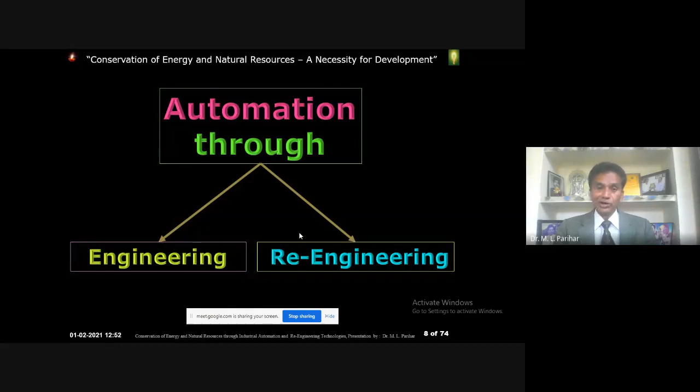Now let's look at human development history. It began with the caveman age, when people lived in forest areas and their shelter was caves. Then came the hunting age, when people used tools made of stone or other materials for hunting animals for survival and food.

Then came the agriculture age, when humans utilized animal power for agriculture - animals were the resource for energy. Then came the industrialization age, after the invention of steam generation and the boiler. Then came electricity, which developed tremendous potential in industrialization. Then came the technological age, when all technologies became available to us.

Everything is now available in our pocket, in the mobile, laptop or system. Now we have entered the 21st century, known as the age of knowledge management - we are attending this session through the internet, sharing knowledge.

You click one word in Google and you get more than 1,000 websites on that particular topic. But earlier, when we were studying, if we wanted to see something, we used to go to the library and refer to encyclopedias and reference books for information.

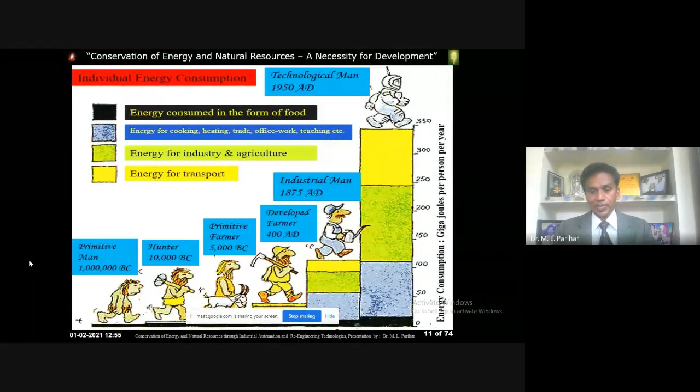There are energy resources, naturally one type comes from overground, and another comes from underground. Overground resources are solar energy, wind energy, and hydro or water energy. Water may be falling water, rising water, or flowing water.

The underground resources are fossil fuel and hydrocarbon, which include coal, wood, and petroleum products. Another resource is nuclear fuel. Nuclear fuel is a new source of energy, a clean, environment-friendly energy resource. It also has two types: fissile fuel and fertile fuel.

So we can see these above-ground resources are renewable energy resources with unlimited capabilities, but the underground resources are limited, and whatever amount is available in the crust of Mother Earth is limited, yet we are continuously extracting these resources, so they are continuously depleting. But nuclear is one of the environment-friendly options available to us.

So we are fortunate that our Department of Atomic Energy has done a lot of efforts to have energy efficiency as well as other applications, from a non-nuclear point of view, for the technological, economical, and societal development of the nation.

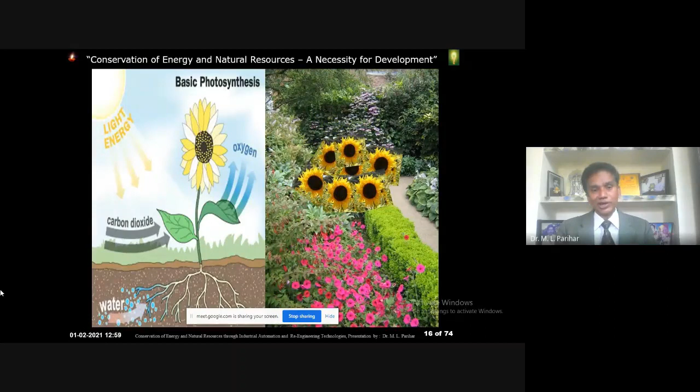Let us see nature's conservation. Nature has already taught us the conservation methodologies. Just see these natural conservation cycles: oxygen, carbon dioxide cycle, water cycle, then fauna and flora. You can see it is very nicely designed. Whoever the engineer or architect cannot design what nature has designed.

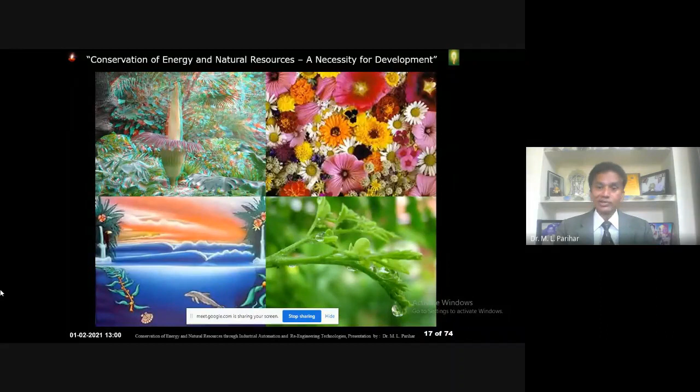You can see everything is fine. Water cycle is there, agriculture cycle is there, carbon dioxide cycle is there, oxygen cycle is there, birds and animals enjoying. These are nature's engineering, whatever nature has done.

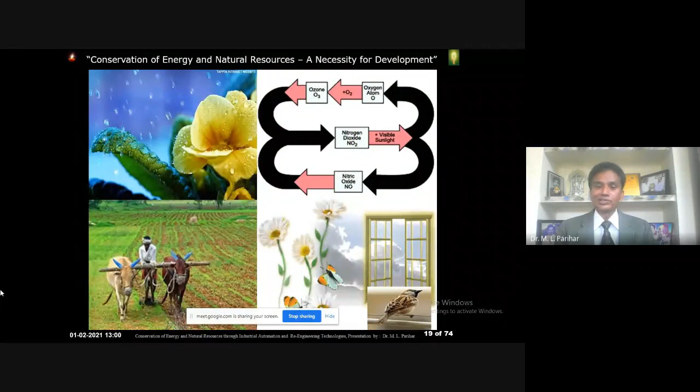Now let us see what our development cost us. We are taking all the resources from Mother Earth - we are taking energy resources, minerals, food grains, medicines, chemicals, water for our houses, industries, and irrigation. We are taking everything, even oxygen, from the environment and nature.

But what are we giving back? Waste and effluent, pesticides and chemicals, pollutants, and we are doing deforestation also. In this manner, nature is getting a lot of challenges.

So we are continuously drawing resources from nature, but we are not conserving the resources, and we are not giving back. Moreover, if we are giving back, then we are giving back pollutants and effluents.

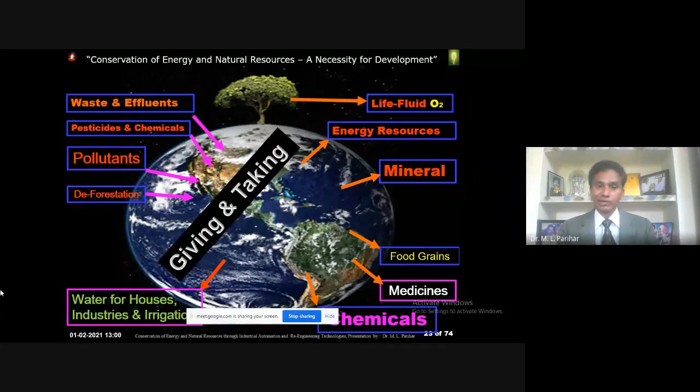We are polluting the environment by generating carbon dioxide and other effluent gases. What is happening? We ourselves are at the challenge that we are breathing in the polluted environment. You see what we are doing.

We have used a lot of plastic, and we are throwing plastics into the natural resources, and we are directly polluting our environment, the very environment from which we get all our resources.

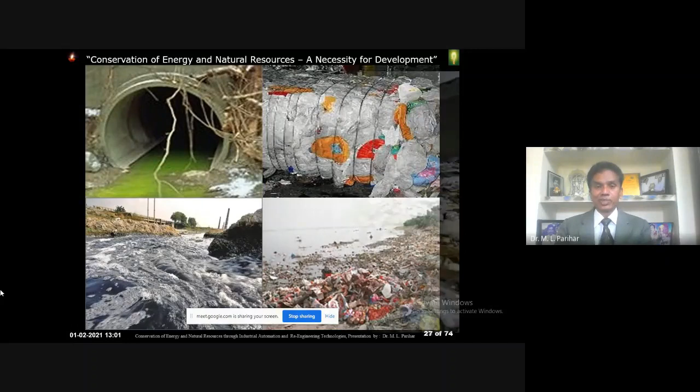You see this is the condition of rivers, our mother rivers. In our country, we treat rivers as a mother, but look how much plastic we have used. You see these animals, what they are eating from the environment ends up in their bodies. We have dumped a lot of our waste products.

Their quantity, their numbers are getting reduced drastically. Now our Mother Earth and nature is sick. We can see that nature, as well as Mother Earth, is in hospital and under life-saving support.

So what should we do? If our mother is sick and hospitalized, we are always worried. We put in efforts to take care of our mother, but we are least worried about our Mother Earth, which in our country is treated as a mother who gives us birth. If both are compared, we give more weightage to the mother who gave us birth than to Mother Earth.

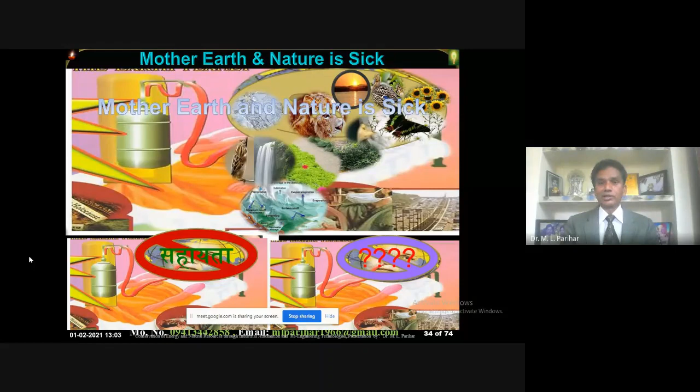We have already studied Newton's third law. It tells us that every action has an equal and opposite reaction. Similarly, nature's law is also there, and nature's law tells us nature never excuses. Another one is the law of karma: action taken today writes a script for tomorrow.

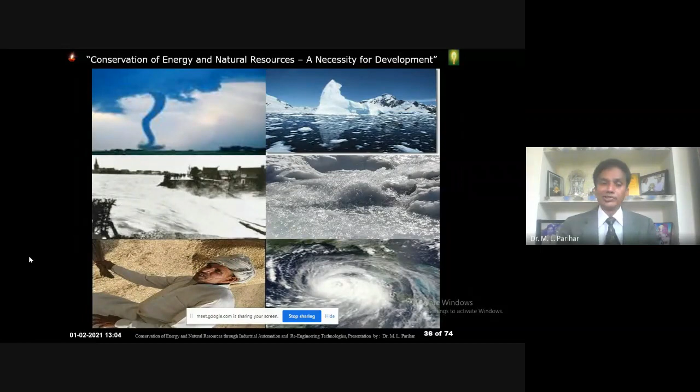So let us see what is happening. These are the revenge of nature. Somewhere cyclones are there, somewhere flood conditions are there, somewhere uncontrolled rain is there, and people are getting sick due to these environmental conditions, or water pollution conditions, or some other region. Somewhere it is tsunami, somewhere earthquakes are there, and buildings are getting collapsed.

So we started our development with this diya, by burning some oil and putting some cotton wick, and now we are at the electricity age. If we are not aware, if we are not awakened, then the resources for having even this diya may not be available. So the word 'Nisarg Rin' is used — Nisarg means nature, and this is nature's loan.

We have taken a lot of things from nature. If we take a loan from any bank and we don't repay it, the bank will take legal action against us. Nature is not taking legal action against us, but we ourselves are facing a lot of problems due to the problems we have created.

So let us conserve all the natural resources. But who will conserve? I will conserve. I will start conservation of all the natural resources, as well as energy resources, from my own house. If I start this mission, and if we all join together to conserve the natural resources, our Mother Earth, then this nice environment can be protected effectively and efficiently.

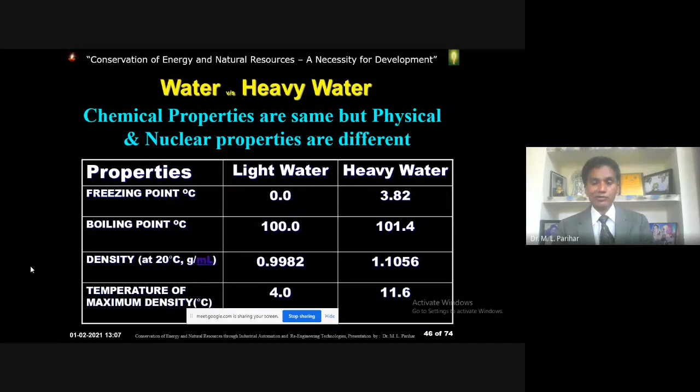Heavy water production methods: there are 3 methods by which we can produce heavy water. We can extract heavy water from normal water or any resource having deuterium. One is electrolysis - if we do electrolysis, hydrogen and oxygen both will be separated. Then hydrogen can be taken to cryogenic distillation, and hydrogen's isotope will also come out.

Another method is chemical isotopic exchange. If we use any chemical for isotopic separation, then it can be extracted from the natural resources.

Another method is distillation. As we have seen, normal water boils at 100 degrees centigrade, whereas heavy water boils at 101.4 degrees centigrade. If we boil, heavy water will remain at the bottom, whereas normal water will get evaporated. If we reduce the pressure of the system, taking it into vacuum, the boiling point difference will be increased. At 100 millimeter of Hg absolute, boiling temperature will be around 52 degrees centigrade for normal water, whereas around 54.6 degrees centigrade for heavy water. In this manner, these 3 methods can be used.

But for heavy water production, we have to see the energy cost as well as the operational or production cost. Heavy water production is a challenging task because natural abundance in natural water, its percentage is 0.015%, whereas nuclear reactor requires heavy water at 99.82%. Concentration increase required from 0.015% to 99.82% requires 7,000 times concentration increase.

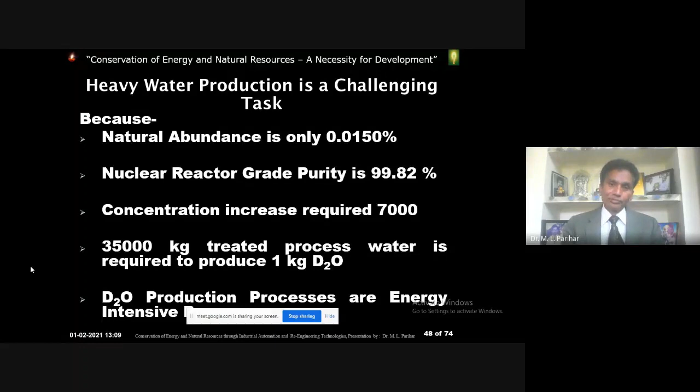Heavy Water Plant at Talcher, near Bhubaneswar, Odisha. Another is Heavy Water Plant Manuguru, in Andhra Pradesh, near Khammam district. Heavy Water Plant Tuticorin, near Kanyakumari. Heavy Water Plant Thal, near Mumbai. So it is spread almost all over the country, and it has its head office at Heavy Water Board Mumbai at Vikram Sarabhai Bhavan, Anusakti Nagar.

This is the brief process. We take water from the Chambal River, Rana Pratap Sagar Dam, and treat it in a water treatment plant. Its concentration in parts per million is 150 parts per million, which in percentage is 0.015%.

Demineralized water is taken to the chemical isotopic exchange process, where hydrogen sulfide gas is used as a carrier gas. From 0.015%, its concentration is increased up to 15%. Then it is sent to the distillation unit, where concentration is increased from 15% to 99.82%, and then heavy water of 99.82% or more concentration is drummed and sent to nuclear power plants for use.

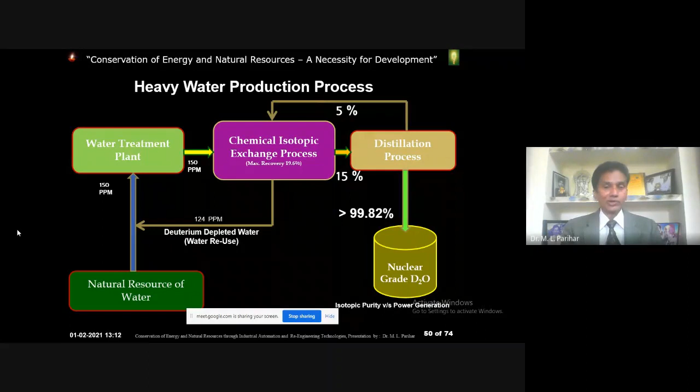This is a brief depiction of the heavy water production process. There are two towers - one is the cold tower, another is the hot tower. Cold tower temperature is maintained at 30 degrees centigrade, and hot tower temperature is maintained at 130 degrees centigrade.

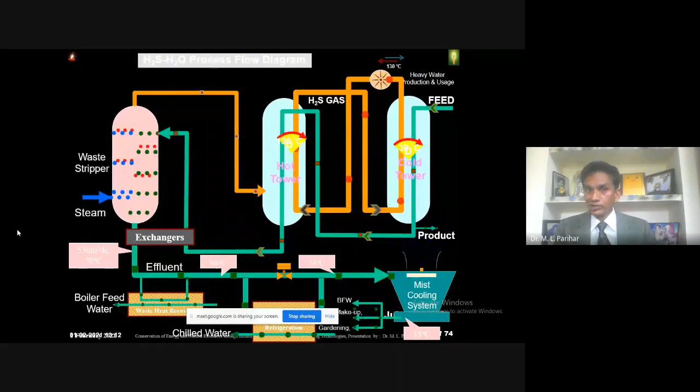Regarding isotopic efficiency of heavy water, or deuterium: if temperature is more, deuterium will shift from liquid like H2O, it shifts into hydrogen sulfide gas. And if temperature is less, then it shifts from hydrogen sulfide gas to normal water. In this manner, concentration at the bottom of the cold tower increases from say 0.015% in first phase, second phase, third phase - different stages are there.

Now, whatever the temperature being maintained, 130 degrees centigrade or 30 degrees centigrade, the fluid which is entering into the cold tower enters at the natural temperature. Its temperature is maintained at 30 degrees centigrade. From bottom, it goes to the hot tower where temperature is 130 degrees centigrade. To increase the temperature, we use steam for this heating purpose, or maintaining temperature.

And we are using lot of heat exchangers to cool down the fluid which is coming from the hot tower and to heat the fluid which is coming from the cold tower. So we are having several recovery systems and a stripper system, and we are utilizing maximum energy, whatever the energy normally getting wasted, but we are using it by cross current heat exchangers. So our system...

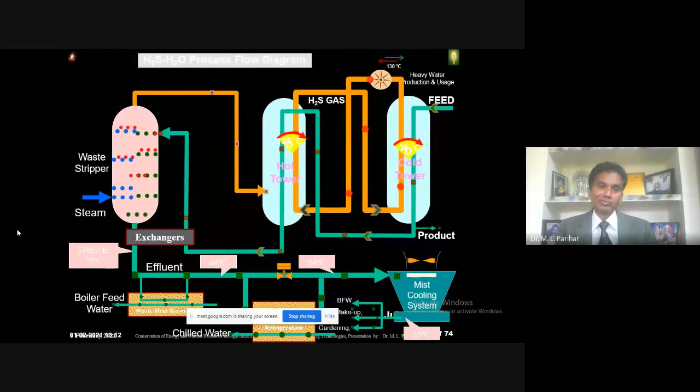remains energy efficient. If we analyze the production cost of heavy water, if we do different methods, then we use steam to maintain the temperature. Steam cost, it is approximate 47% of the total heavy water production.

Another, we use electricity to run various systems, various equipments, various pumps. Our power cost and electricity energy cost, it is 30%. And remaining different chemicals and these all utility items and manpower, it is in the very lesser category. But if I add steam and power, electric energy and steam energy, it is approximate 77%. Means 77% of production cost of heavy water is in the form of energy.

And we know that conservation of energy, there are a lot of scopes. So what measures we have adopted for conservation of energy and natural resources, just have a look.

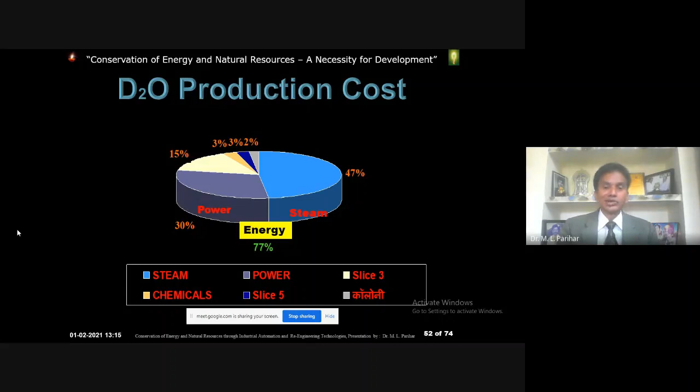In our department, this heavy water plant Kota, one scheme was initiated, hot ideas into cold case. Whoever is working in the department, whatever the idea is coming, what should be done for the conservation of energy as well as the natural resources, you put this idea in the written format in a particular...

energy conservation scheme. There is a committee who does analysis, and if somebody is required, then whoever has floated the idea is called and the matter is discussed, what is his idea and what engineering methods are available to implement the hot idea to increase the system efficiency as well as conserve the energy resources.

The conservation word itself, it comes from conservation of energy, means without compromise with the comfort. Whatever the comfort or whatever the need of energy, it should be fulfilled. Then after that, if we are able to maintain our comfort without compromise, but energy is reduced or energy is conserved, then it is called optimized energy conservation.

So with this, a lot of engineering modifications were taken place or implemented. So here, as I have used the term re-engineering technologies. Re-engineering technologies means this plant was constructed or installed or commissioned during 1980s, and in the 2000s approximate, we started a lot of energy conservation methodologies. So some of the ideas are just being shared here for your information.

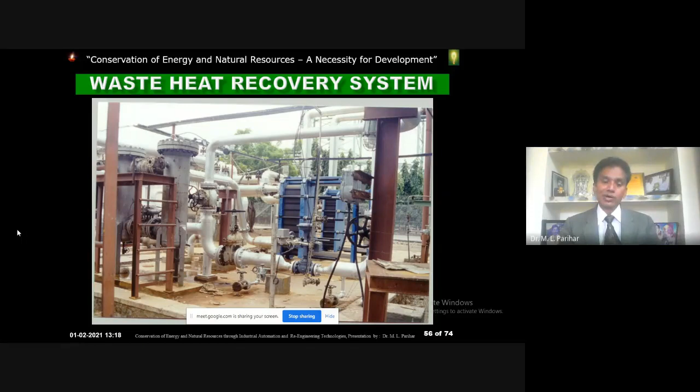Another is trimming of pump impeller. You know that your pumps are designed for a full load capacity, whatever. Then we use discharge valve or control valve in that line. In this manner energy is lost. So by doing the trimming of the pump impeller, energy was conserved.

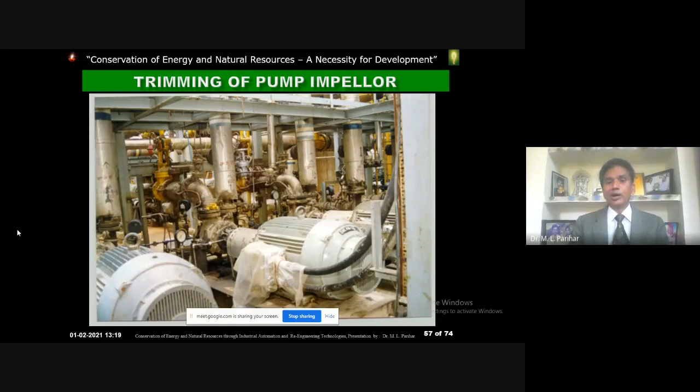Then discharge of one pump connected with another pump. We have a number of pumps discharging the same fluid in different systems. If one system has a lesser requirement and another has more requirement, the discharge of one pump is connected with another pump. So pumping cost and pumping energy is reduced. In this manner, it saved a lot of energy.

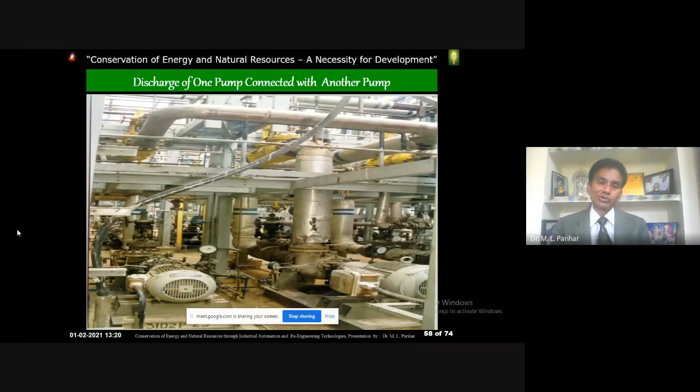Now, interconnection between cooling water and chilled water. We had a chilled water system for maintaining or reducing the temperature to 10 degrees centigrade, from fluid coming at 30 degrees centigrade. First we do cooling through cooling water coming from the cooling towers, and separately we had a chilled water generation system. We planned that we should not use the freon-based refrigerator, so we stopped that and interconnected the cooling water line and chilled water line. In this manner, we conserved a lot of energy and also saved natural resources.

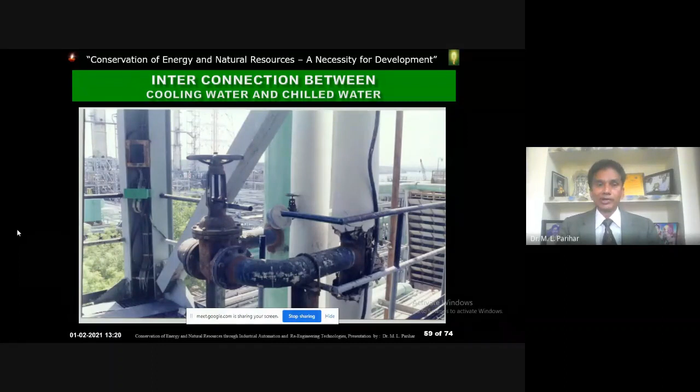Another improvement was the variable frequency drive. We were using normal motors for our system, and energy was getting lost. With variable frequency drives, energy was utilized as per the actual requirement of fluid flow in the system.

We had a plate type distillation column with 5 stages and 9 towers, where every stage had a reboiler and a pump. We replaced this plate type distillation column with a packed distillation column. We kept the first stage itself, but the second, third, fourth, and fifth stages - 4 stages - were replaced by a single packed distillation column. This conserved the pumping cost as well as the steam requirement for the reboilers, increasing our quality and conserving a lot of energy.

Moreover, earlier the operator used to go to the field where parameters were spread across approximately 58-meter height, so every person had to climb the staircase to check parameters and operate the valves. But having a single tower conserved a lot of human power also.

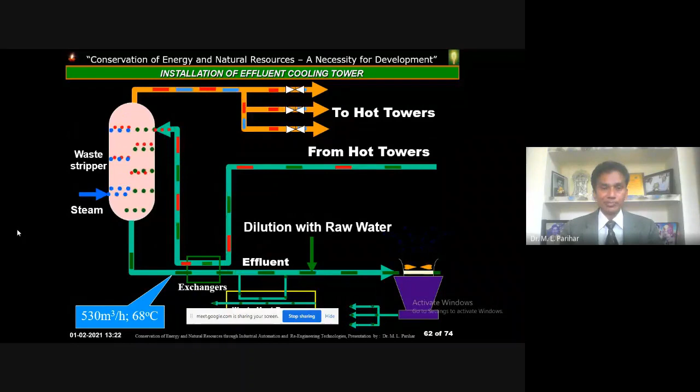Then, this effluent cooling tower was also requiring power for the ID fan. So we further modified it and installed a mist cooling system. With system pressure itself, water comes to the mist cooling tower - it is not a cooling tower, but a different kind of system. The hot water gets spread out, and after getting cooled, it falls down and is collected in a water pond or storage tank, then recycled back. So with just the one-time installation cost of the mist spray system, we operate this system without any energy, and the water is being reused.

Though the word used here is effluent, it is not actually effluent - it is demineralized water, but since the temperature is more, it is called hot water. After installation of the mist cooling system, 100% of this water is being reused or recycled in the system.

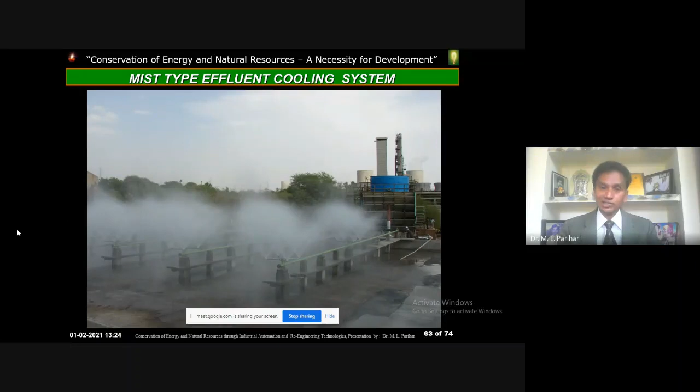We were using freon-based refrigerators. We stopped that and installed a vapor absorption refrigeration system by utilizing the waste heat in our hot water. By this, we are able to generate chilled water from 25 degrees centigrade down to 15 degrees, and it is of a big quantity - 165 cubic meters per hour.

So in this manner, we have conserved the waste heat, and we have conserved the resources, and we have conserved a lot of energy. Here we have installed one solar-based solar steam generator system.

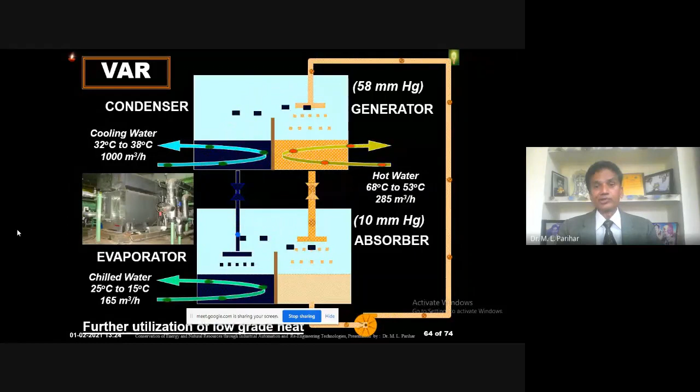In this, solar energy is normally utilized as photovoltaic cells and photovoltaic diodes. But these are not so environment friendly, because a lot of earth crust is utilized for developing them, and after some time they may not be usable due to fragility or environment condition. So Atomic Energy has started energy conservation measures, as well as alternative resources for the photovoltaic cell and diode.

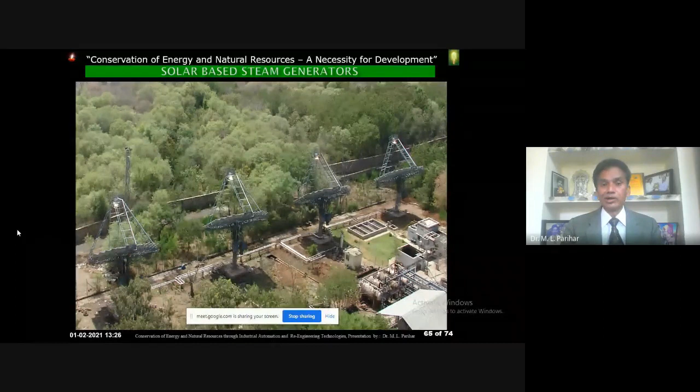Earlier we were using a pneumatic control system, since we were using hydrogen sulfide gas as a carrier gas, which is highly flammable, highly toxic, highly corrosive. At that time, in the early 80s, pneumatic system was the only preferable option. But when we started energy conservation methodologies, we replaced the pneumatic control system with the DCS system.

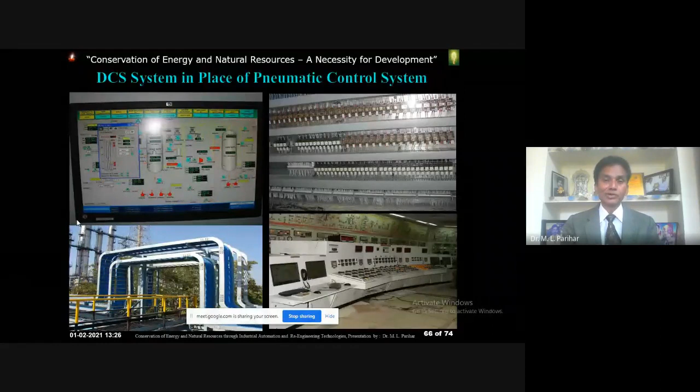We have installed a sewage treatment plant in Atomic Energy industries and in the township, in our colony itself. We have 100% sewage treatment; no sewage water is discharged into the environment or nature. We treat it and recycle it. Whatever treated water results is used for our gardening purpose and other purposes. In this manner, we are not polluting the natural resources by throwing sewage garbage into the natural environment.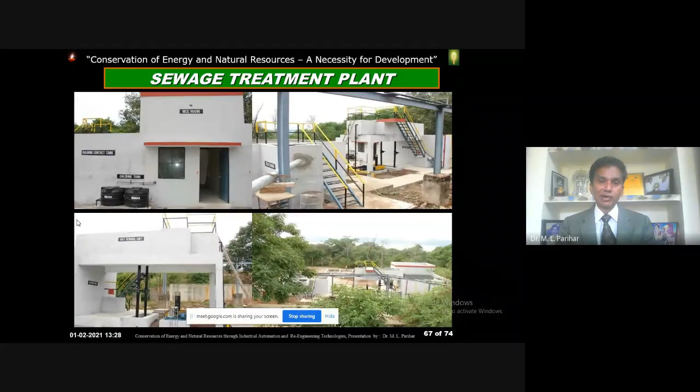As I told you, to produce 1 kilogram of heavy water, we need 35,000 kilograms of demineralized water, but this balanced water gets recycled back into the system. The nearby area people were doing agriculture, but now we have started conservation of water also.

As I told, we have installed an effluent cooling tower and this cooling system. Now this system is not discharging water outside, but sometimes we send water for agriculture purposes to the nearby area, as per the requirement of the nearby farmers.

We are having massive plantation beyond the fence also. We have the vision that this heavy water plant, Kota, as well as the other units of the Department of Atomic Energy installations everywhere, environment management is taken care of by one and all. You can see here we do the massive plantation inside the plant as well as beyond the fence, outside, and also in our colonies and nearby areas.

For this heavy water plant was given a lot of awards for the work towards the plantation. You can see the difference. The time when you visit Rawatbhata, you remain outside the DAE colonies and enter the heavy water plant colony - there will be a lot of environment and temperature difference. These colonies have a lot of trees, taken care of by the employees and residents.